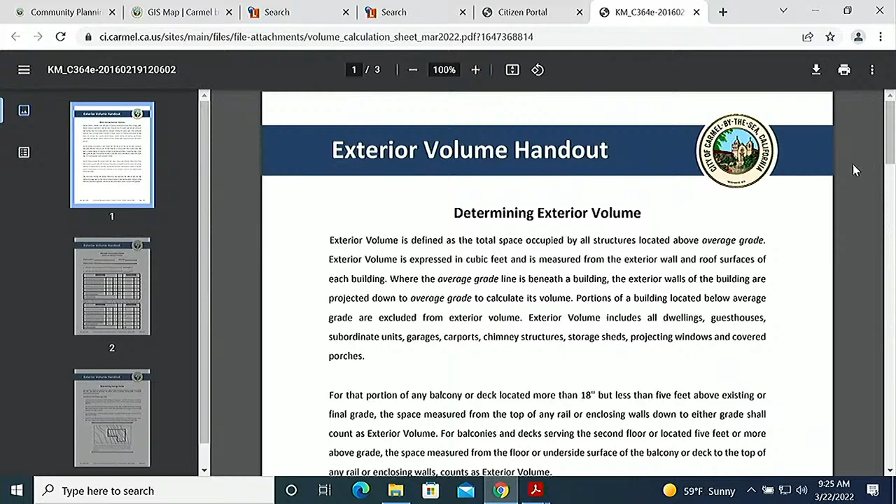Sullivan, if you could go to page 2, please. This has always been a submittal requirement; it just fell to the side, but we're asking you to start resubmitting this document to get you thinking about volume, because we've recently had a lot of problems with projects not passing volume. So it's important to know right off the bat how much volume you're allowed for your site.

Not in this web version, but if you download it, all the boxes are fillable—you can type everything in and print it out. It's very easy. The box at the bottom is an example of a 1,700 square foot residence on a 4,000 square foot site. You basically follow the prompts, answer the questions, and it'll spit out your allowed volume.

Sullivan, if you could go back to the checklist, please. Another change we're asking for—we'll get to it at the end of the checklist—is acknowledgment that the applicant has read through and understands the process and submittal requirements, just to ensure a complete application. So on page 7, there's a signature line we're asking you to sign and return, stating you've read through and understand the submittal requirements. Sullivan, if you can go back to page 4, please.

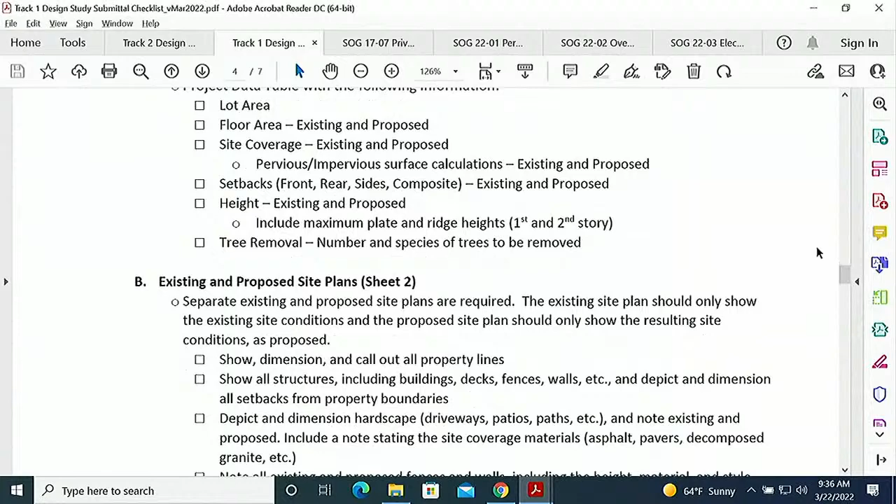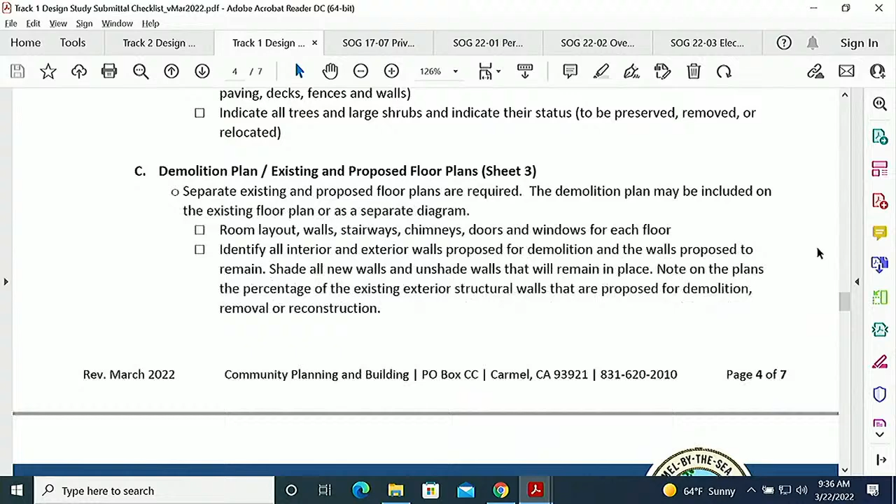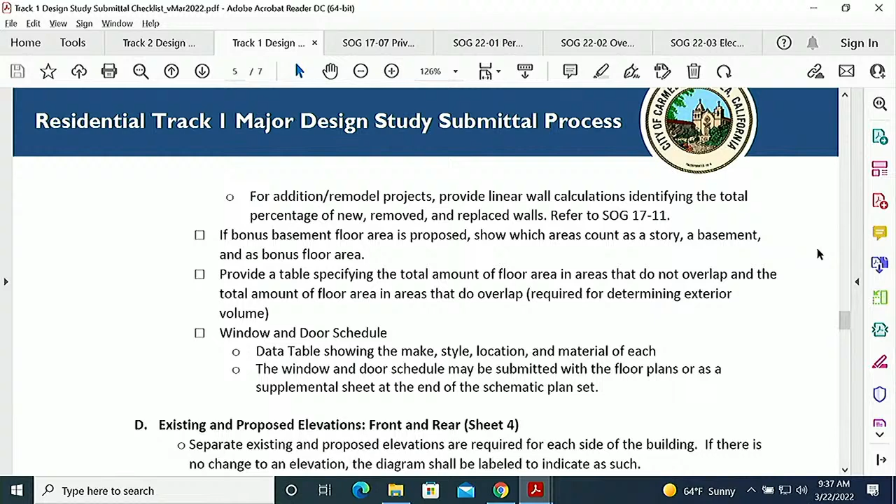If your scope of work for a track 1 major project doesn't warrant what's being asked for, you can of course just exclude it. But again, it's the same as before, where we're asking for the information to be provided in a certain order, presented in a certain way, in the hopes that it will expedite the review and simplify it. With both track 1 and track 2 projects, sometimes we receive plan sets that are 30 pages for a 200 square foot addition, and it's just not necessary. So we're trying to cut down on the information needed, only asking for what we need to review the project, in hopes it will simplify things and speed things up.

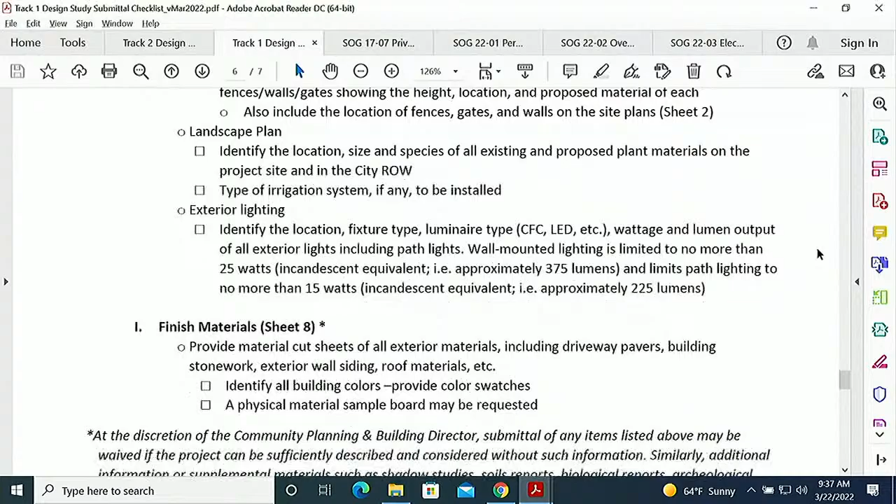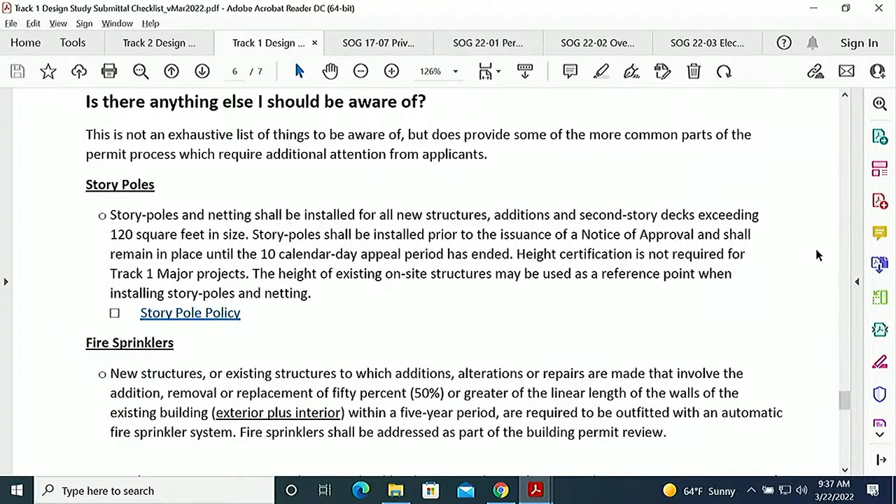So I briefly mentioned at the beginning, this is for track 1 majors. We are still working on a track 1 minor checklist, for things like if you just want to submit a fence, or just want to do landscaping, really simple projects that still require a design study. That checklist will be tailored for project-specific things, so if you want to do a fence, it'll say you need XYZ for a fence. If you want to rearrange your site coverage, you need XYZ for site coverage.

That's great, thanks, Evan. Any questions on track 1? It flows pretty similarly to track 2.

Okay, Sebastian, I'm assuming nothing on the Zoom. Randall Turner, unmuted, if you have a question go ahead. Oh negative, I'm just listening in along with Rick. Okay, very good. Great, thank you, well, thanks for coming everybody today. Okay, great, we have one more, and I'll run through it quickly.

There's one more SOG that we're developing right now, and it came out of a need we've seen. We've been jokingly calling it the Where's Waldo syndrome back in the office. We have a very difficult, convoluted, multi-step process, and that's just how it is. It didn't get that way by accident.

Because there are multiple steps, you get a planning approval, and then you come in and get a building set approval. What has been happening, and this is all unintentional I'm sure, is that what's approved at the planning level for materials, height, windows and things like that sometimes changes out of necessity or desire by the applicant when the building set is submitted. If we don't get those highlighted, with call outs or something like that, we're not going to catch all of those just because of the volume we're pushing through, and the planners can't necessarily go through with such a fine-tooth comb on the building set.

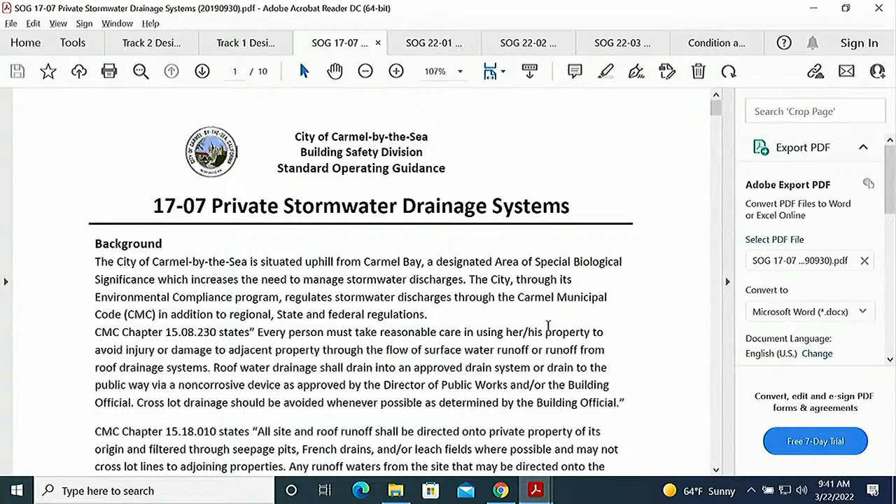Well, the good news is I have no news. So I'm actually going to go real quickly over our drainage requirements, because that's really where environmental compliance interacts with the building community. You guys are already probably fairly aware of our requirements because they've been around. The newest drainage requirements have been around about 5 years now. I'm sure you guys have seen the SOG 1707, which is on the screen.

This was set up about 5 years ago because our ordinance was very cumbersome, a little bit difficult to follow. So we wanted to devise a process that was going to be simpler for people to follow, and at the same time would help reduce the amount of neighborly issues we've encountered around drainage.

So how many of you are not aware of this at this point? Okay, one person.

I'm not going to go in detail over what it requires, just some of the basics. I really love that planning added the drainage plan as a requirement at the planning phase, because I think that's going to help a lot of projects. It's thinking about where are you going.

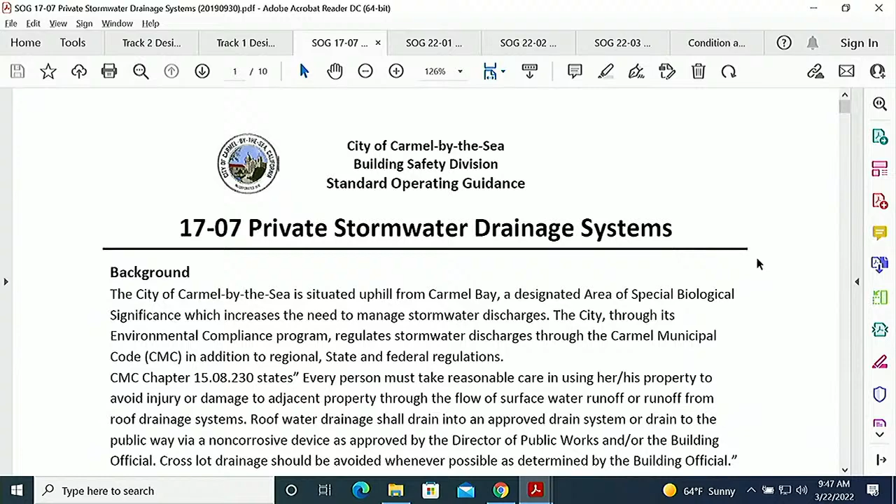One thing I will also note, actually, in terms of drainage even for residential, is important -- Sullivan, if you can scroll down to the last page that has the hydrologic soil group map. That guidance really provides a lot, we try to make it easy for people to figure out what we want. We have a little map that shows how your drainage may be put in the ground, and we provide some regional guidance on how to do rain gardens.

Another map that's important is this one -- this is the hydrologic soil groups in Carmel.

That's available on our GIS also, so you can scroll in, zoom into your property and see what kind of hydrologic soil group you have. On the map, green is hydrologic soil group A, meaning it drains really well - those are our sandy soils. This whole area down here and down the south end of town is basically all sand, so if you're going to put an infiltration feature there, it's going to be fairly straightforward. Especially for small projects, the city's not as concerned with infiltrating on site, so you won't have as many requirements.

If you go to this yellow area and then the red area - yellow is C, and red is D. Anybody who's done construction in the northeast part of town knows it's all clay. D means it doesn't infiltrate. So any hydrologic soil group D projects, we require civil engineer involvement even at the planning phase, just so there's an understanding that the project might work. They're the ones who at the end of the day are going to have to design your drainage at the building phase anyway, so it's really important for them to be involved early on so everyone's on the same page.

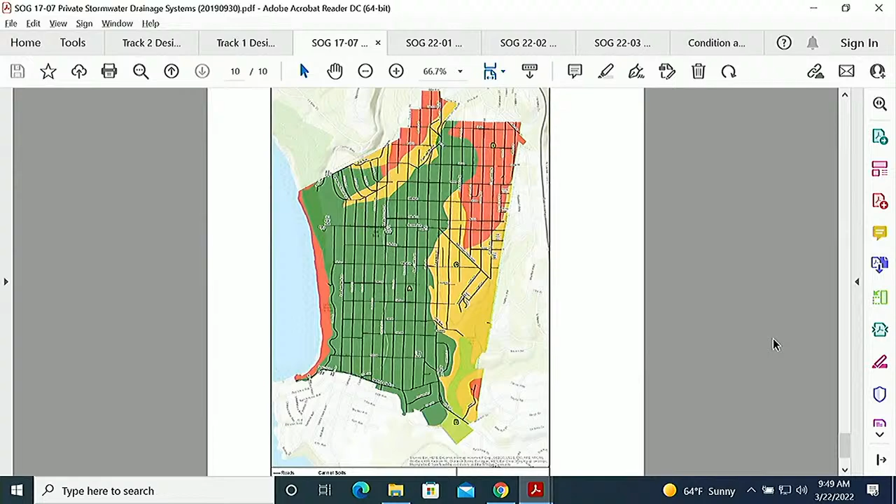Agnes, can I highlight something you said that I think is really important? You mentioned these layers are all on the GIS map - the one I showed at the beginning where you can click and get your property files. Yeah, actually this layer is on there. If you go on the right, the list of layers, under land and environment, click that carmel soils, and you can put that up for yourself.

In the update we're doing to the GIS map, when you click on a parcel, that soil information will come up - it's not programmed yet, it's on a development site - but eventually you won't even have to put this layer on. You click on the parcel you're interested in, and it'll tell you your soil layer, whether your property is historic, whether you're in a high fire hazard severity zone - all the stuff you need to know before you start developing. We're trying to build it into our GIS map so once you select the layer it's on there, but we're programming it so all you have to do is click on the parcel, and it'll tell you everything you need to know about the property.

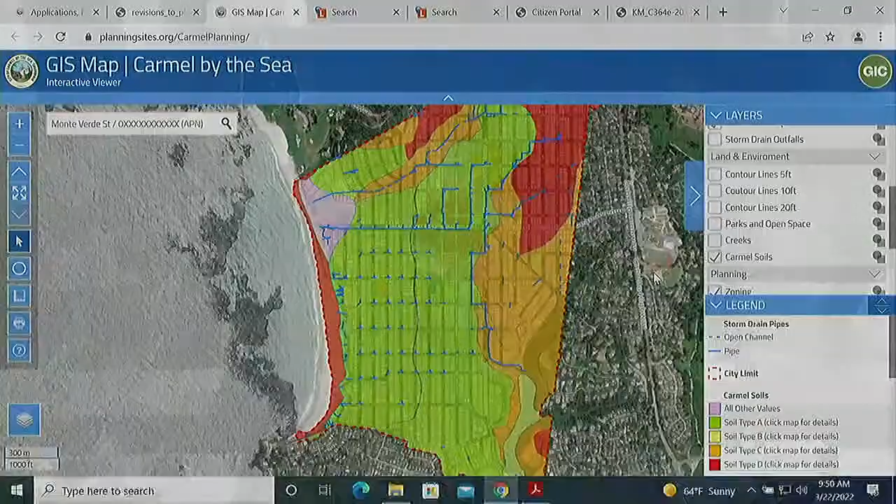You stated that the D soils would require a civil engineer - I'm assuming others wouldn't. What about the intermediates? Where's the cutoff for when a civil would be required, and is there guidance on the website for that? So that's on that same SOG. It sort of has a list of projects where a civil does not have to be involved - any projects that are, I think it's over 1,200 square feet of new...

Let's see, hold on - this has been 4 years, I should know this by heart. Yeah, 1,200 square feet of impervious area created or more has to have a civil engineer involved, even in soil group A. But anything under that, we can be more flexible in terms of civil engineer involvement.

So this is set up so that if you have a super simple project, really a small addition, and you're meeting all our requirements where your site slopes are minimal, less than 7%, and your site soils are well drained - if you do your drainage at the surface and have good soils, and you're not doing an infiltration feature, you don't even need a special permit. An architect can do it.

If you start doing an underground infiltration feature, but you're in good soils under 1,200 square feet of impervious area connecting to it, an architect can do that. If you go over 1,200 square feet in good soils, or if you're in bad soils doing underground infiltration, now you need a civil. If you have bad soils, whether surface or underground, you have to have a civil involved. If you're in good soils but under 1,200 square feet, an architect can do it. Anything over 1,200 square feet of new impervious area, we want a civil involved. So a simple project you can kind of do yourself, but as the requirements for handling water increase and the soils get worse, the requirements get higher, and that's where the civil gets involved.

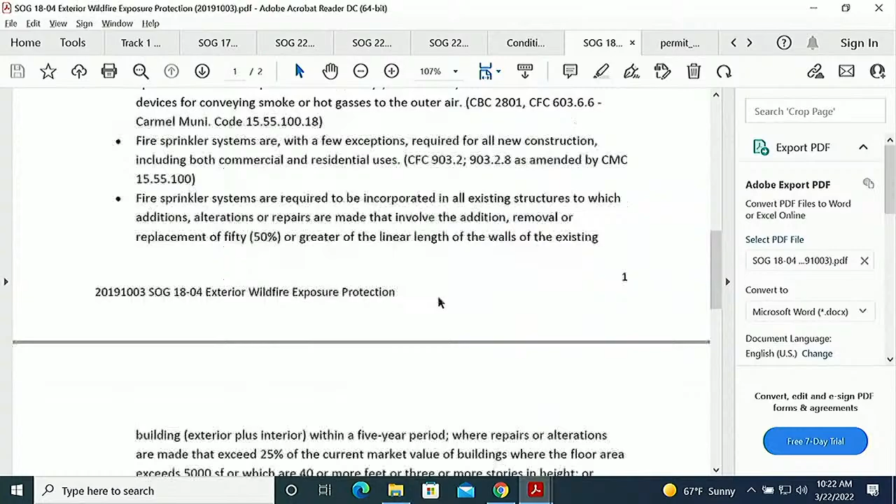The reason I bring this up was partially because of Council Member Barron's announcement of possible changes for the fire requirements. I wanted everybody to be aware that we have a guidance document. If you scroll down, Sullivan, scroll to the map. We have our wildland urban interface map on this SOG document. I also bet it's on our GIS mapping tool. That's a safe bet. This also has all the requirements of the high fire severity zone construction, mainly new construction, significant remodels and stuff like that. I just want you to be aware of where to find that information.

Updates may be coming in the future. I wanted to take this time to introduce Dwayne Dauphiné, our new building inspector. I'm going to let Dwayne come up and introduce himself and give you a minute of his time.

Thank you, Jermel. I'm Dwayne Dauphiné, new hire here at the city for building inspection services. I want to give you a little background about myself, not my life story. I come from the construction trades. I did 25 hard years in the field before becoming a building inspector for the county of San Benito, where I've spent the past 5 years as a building inspector, building official. As a result of being in the trades, I empathize with the building community and have been on your side of the table in the inspection process and submittal documents and so forth. I hope to be a good resource of information for you folks, and committed to making policy changes, procedure changes, improvements, and I'm really looking forward to the opportunity to work in such a nice area where clearly you contractors have your act together. I'm really looking forward to working with you out there. Thank you.

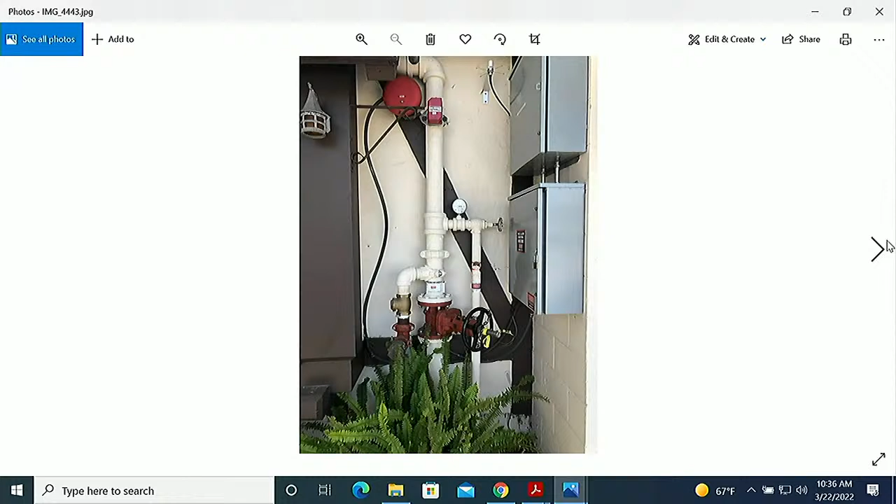So again, trying to be creative, trying to solve a problem, we worked with the fire department and came up with some guidelines about how we can cover these up in the future. If you go to the good example for me - thank you. So this is the good example of what we're hoping fire risers will look like going forward. You can see the only thing visible from the street is just the hose connection.

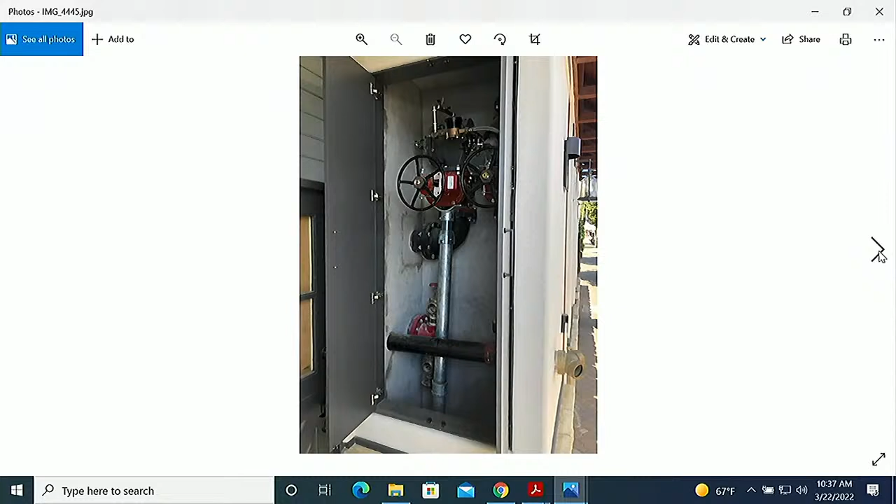And then go to the next one. All that equipment's inside. Really what it came down to is, sure, you can put a door on it, you just have to be able to access it, and the door can't have a lock on it. It's really no more dangerous to have a door that opens to this equipment than having it out there on its own already where people can touch it. So this at least gets it out of the public eye. As we're moving forward on projects, if there's a new fire riser in the public view shed, we're going to be asking for some kind of shielding or cover.

There's another project right now. Remind me of the building, Evan. It's the one behind Flaherty's, the one you just did with the Historic Resource Board. I don't know the name, but it's okay, it's over just off of 6th. There's a building where they're redoing the bay window, and there's a fire riser and equipment underneath.

So we got the fire department to sign off on essentially building a box around it in the landscaping, so it doesn't look like a bunch of gross pipes. So keep that in mind as you're designing your projects. We're going to be asking more about where your fire risers are going, where your downspouts are going, where these appurtenances that have to be there are going to be, and how they're going to affect what it looks like.

Residential also. This is all really important stuff. It all adds to what a place feels and looks like.

Where did my agenda go? I moved it on myself. So I think that gets us through the fire department.

Our friend Daryl from CAWD was hoping to be able to join us today. I don't know if he's going to be able to be here. Maybe he's on Zoom. Sebastian, do you see Daryl from Carmel Area Wastewater District on Zoom by any chance? Yes, just unmuted. Oh, super. Okay, hi Daryl, go ahead. How you doing? Can everybody hear me, hopefully? Yeah, we got you.